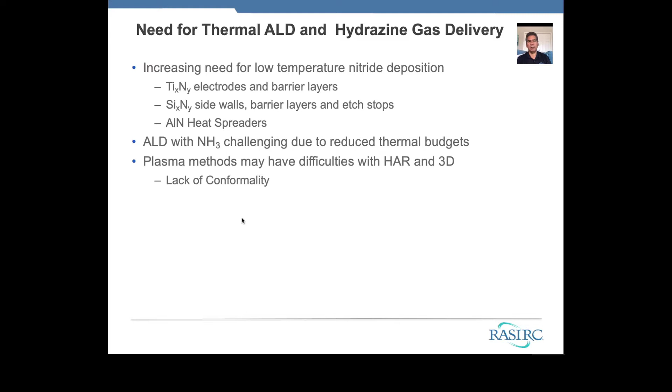So why did we choose gas phase hydrazine? If you just look at some of the thermodynamics here for hydrazine versus ammonia, we were given early on an initial target of 300 C by one of our collaborators.

And if you look at the thermodynamics at that temperature, the delta H of titanium tetrachloride plus hydrazine is still negative at -40 kilojoules per mole at that 300 degrees temperature, whereas the delta H for ammonia goes positive and is no longer favorable at 117 kilojoules per mole. So that gave us an indication even before we started that reaction with hydrazine could lead to much better results for reduced thermal budgets.

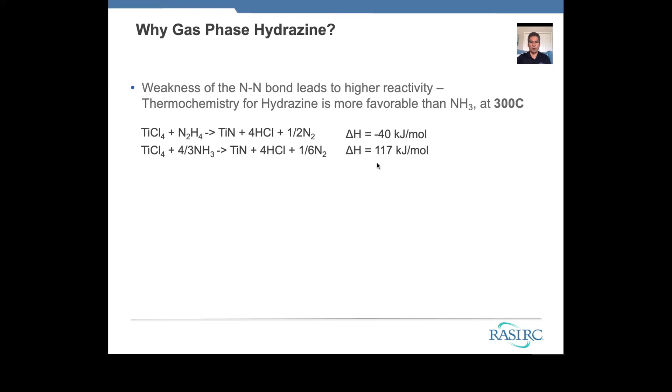There's a question of hydrazine safety that has come up, where hydrazine has a long history of being used as rocket fuel, and we had to make sure we had a very safe way to deliver it. So what we've done is we take ultra high purity anhydrous hydrazine and we take it through several additional purification steps to remove water down to very low levels, which is the topic of another talk.

But we then take the anhydrous hydrazine and we stabilize it by mixing it with a proprietary solvent. And what the solvent does is it stabilizes the material and makes it a little bit safer, where this mixture can then be used either with a carrier gas or with vacuum draw to take the hydrazine molecules to the process chamber, where the solvent remains behind in the ampule and does not enter the gas stream.

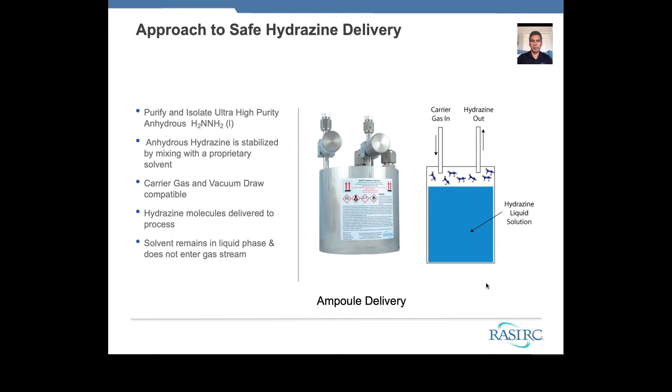In this particular case, we've chosen a solvent that's really more like a viscous oil, has extremely low vapor pressure, where if you tried to measure solvent in the gas stream, you're down around 1 to 2 parts per billion. What this buys us from a safety standpoint is we're able to raise the flash point of the mixture, which leads to a much better safety classification from the standpoint of having lower safety numbers.

If you look at the United States Fire Code for just your anhydrous hydrazine, you see that it has a 432 rating, whereas if you look at the US Fire Code for our formulation, it has a 321, and reducing it by this amount has enabled us to enter into many different facilities, large company collaborators, as well as universities and smaller labs.

So with the solvent-based delivery of anhydrous hydrazine, we found that we do lower the vapor pressure a little bit, but it's 10 to 12 torr versus 14 to 16 torr for hydrazine by itself. However, it's still plenty of vapor pressure to do ALD, where just at ambient conditions you get about 20,000 parts per million, which is equivalent to about 2% hydrazine in a nitrogen stream.

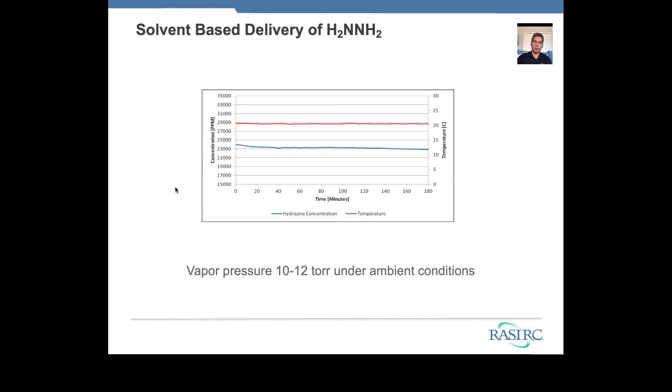And I wanted to mention some early work that we did in this area. The work was done by who's now Dr. Stephen Wolf, who was a student at the time in Professor Andy Kummel's lab at UC San Diego, where in some initial studies comparing hydrazine to ammonia at 300C and 400C, they basically found that hydrazine at 300C, which is here at 592, gives similar resistivity results to ammonia at 400C, which they found up around 555.

So you basically gain 100 degrees by going from ammonia to hydrazine, and 100 degrees is very significant with today's restricted thermal budgets. They also noted an improvement at 400C in hydrazine versus ammonia, and at 300C the ammonia is basically not usable.

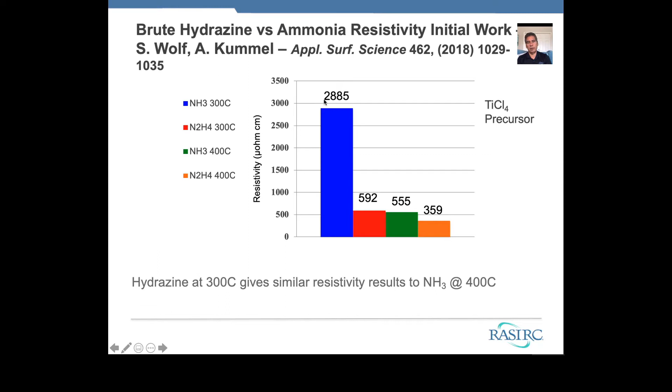In the current study, we wanted to expand on this work a little bit more, where we wanted to look at a little bit broader temperature window, as well as look at some of the other properties a little bit more closely. So the study was very similar, just a little bit broader in scope. We also looked at varying thicknesses of ALD cycles.

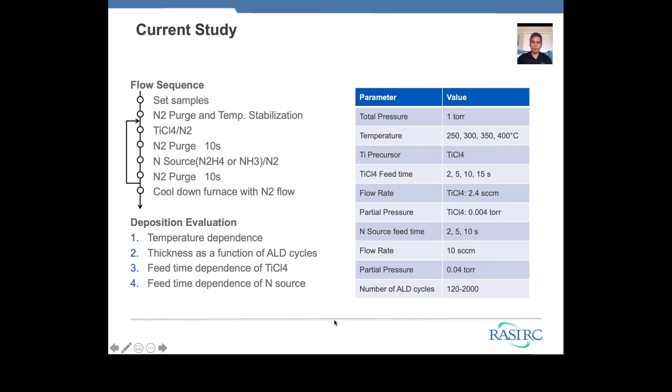In the current study, we used a little bit more crude of a reactor system, where it was basically a tube furnace where we built our own ALD manifolding to go around it in order to perform the ALD sequence. One of the drawbacks here was this tube furnace does have a fairly large volume, which led to some fairly high pulse times that were needed in ALD because of this large volume.

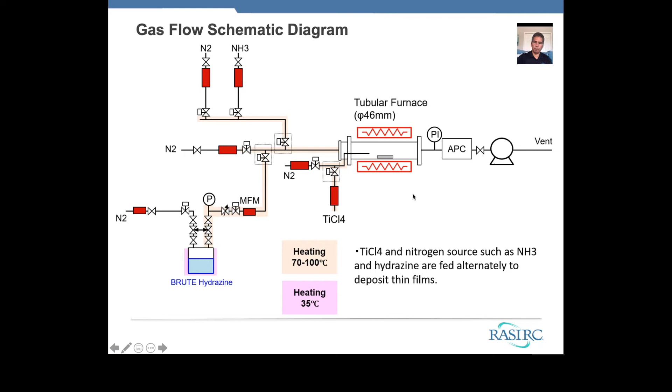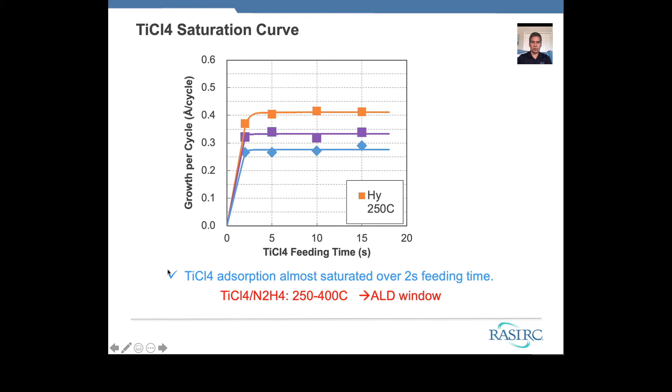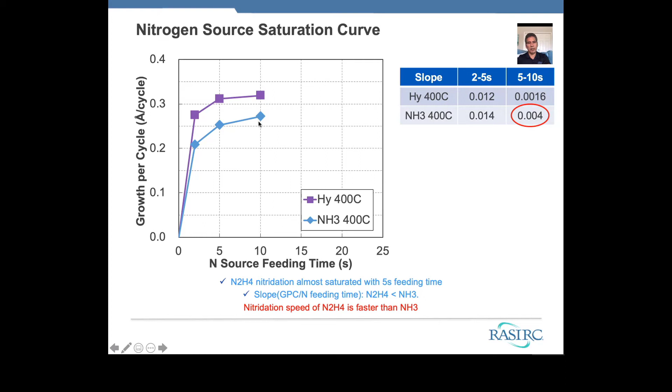Looking at the nitrogen source saturation curve, for hydrazine, you'd first note a little bit higher growth rate, but in addition to that, you see a relatively soft saturation, but it does saturate, whereas ammonia, you also see a soft saturation, maybe even more soft, where this is not quite flat yet after 10 seconds of ammonia pulse time.

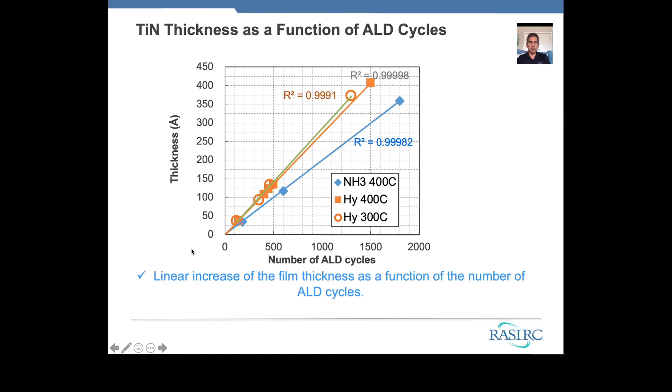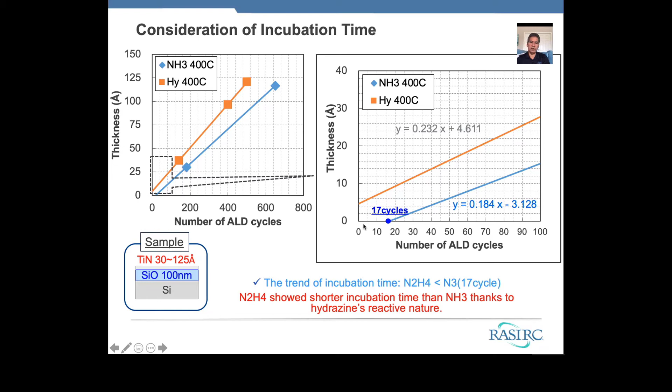Looking at the titanium nitride thickness as a function of ALD cycles, we see that for hydrazine and ammonia, we do get linearity in growth in thickness versus cycles. What I wanted to point out, if you zoom in on that, you see that there's a little bit longer incubation time for the ammonia, where it took about 17 cycles for that growth to initiate.

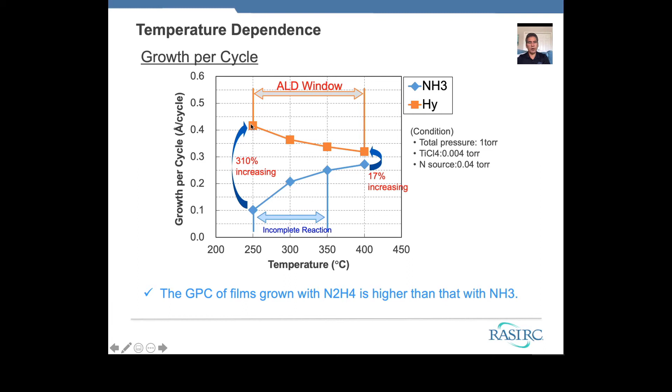But more importantly, you see that it drops off significantly once you get down to 350 and then below on to 300, where basically once you get below 350, the reaction is incomplete and is not taking place entirely, leaving a lot of residual materials, which I'll show in a minute. Whereas in the ALD window for hydrazine, you actually get an increase in growth per cycle in going from 400 to 250, where these values are still fairly good over the entire temperature range.

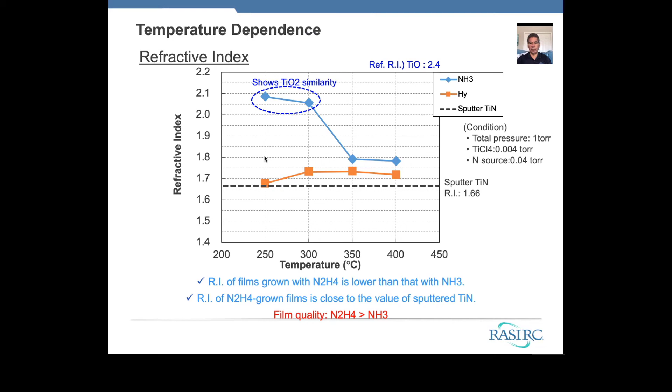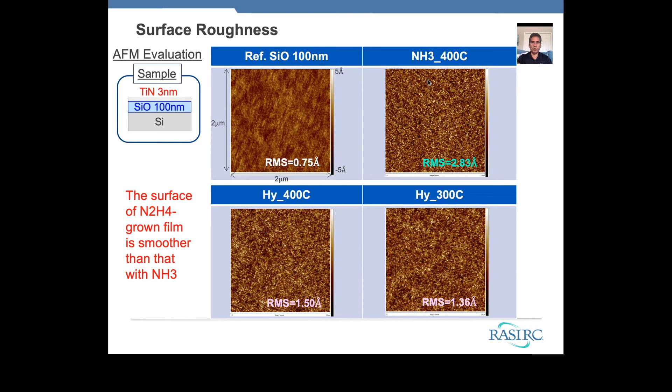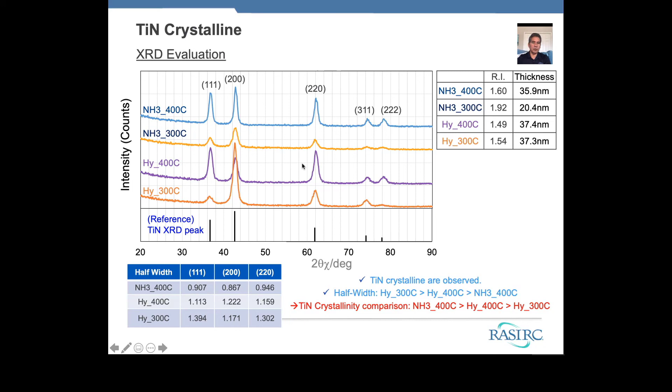We do notice crystallinity in all of the films that were grown. This is by XRD, where you see a little bit higher crystallinity in the ammonia film grown at 400, but overall you see pretty good crystallinity in all of the films that we worked with here.

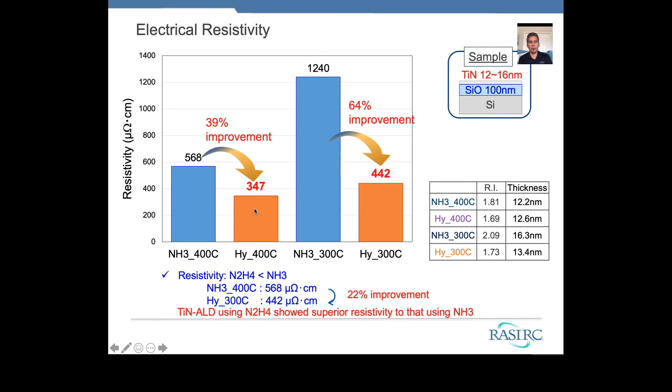We were also significantly lower at 300C, where this got down to about 442 versus the 1240 for ammonia, where this ammonia was not quite as high as that observed by Professor Kummel. But overall, at 300C, you see a 64% improvement in resistivity and a 39% at 400C. So even if you were just to drop in hydrazine as a replacement in the current high volume manufacturing process at 400C, you still get a very significant improvement in resistivity.

In summary, we've shown that the ALD window for hydrazine is about 250 to 400C, where higher growth per cycle is achieved for hydrazine versus ammonia. This is significantly higher and could be important for high throughput manufacturing. We also saw a shorter incubation time for hydrazine versus ammonia, which could also lead to some of the better film quality that we see and better resistivity.

We also see crystallinity in all of the films that were grown, where the impurity concentration of titanium nitride was decreased by using hydrazine compared to ammonia. And finally, we did see much improved resistivity for films grown with hydrazine versus ammonia in the entire temperature range that we looked at.